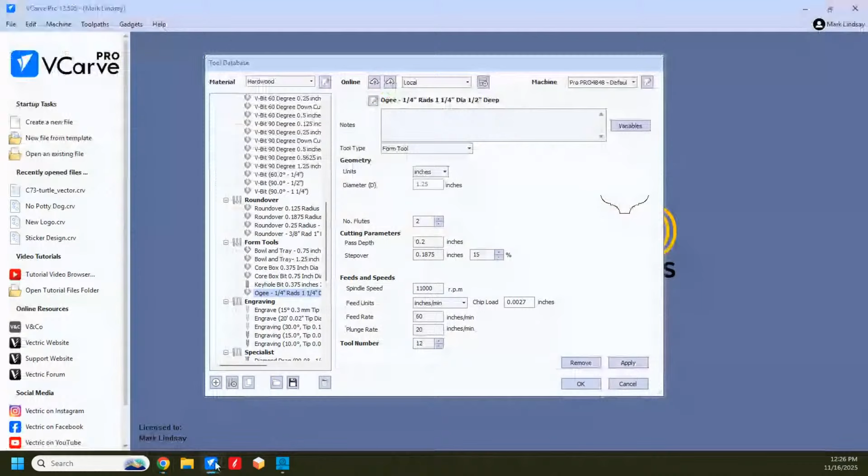I'm going to go over here and download it. Now that brings up another question - where am I going to download this to? I'm going to download it to the tool database folder that all of these tools are entered into.

But I'm going to cheat, and I'll show you that cheat. Click Cancel to get out of my tool database. If I go up here - and again, I'm in Vectric 12.505 - if I go up here to File, then come down to Open Application Data folder, click on that, it's going to open up all the program data for this version of VCarve, the current version I'm using.

You can see through my address bar up here where this is located. It's on my C drive. The folder is Program Data. The next subfolder is Vectric. The next subfolder is VCarve Pro. Then the next subfolder is 12.5, that's the version I'm using. And if I look down here, there's a folder that says Tool Database. If I go into that folder, there are all of my tools.

This right here, this database, tools.vtdb.vectric, that is the default tool database that comes with your software. None of the tools you have added are in this database. If you absolutely, completely, and totally, entirely mess up your tool database, you can always go back to this one and it will give you a clean install of the database that you had when you first started.

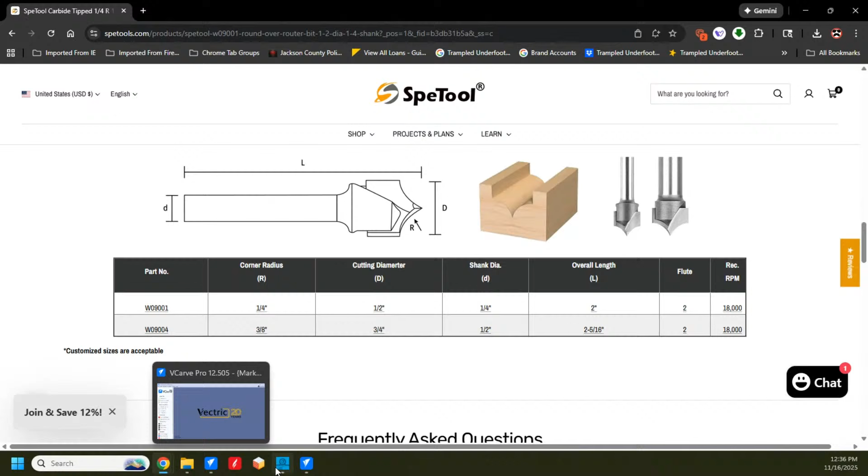So now let's go back over here. I'm going to look at my bit, and make sure this is the right part number - it's the W09001. Okay, not too bad. I'll come down here to VCarve 12.0. I'm going to go into the SpeTool database. There's roundover bits right there - point roundover bits right there. And here is the 1/4 inch shank category. And there is that tool - W09001. There is everything I need.

But it's in version 12.0. So what I want to do is export this tool only - this is the only tool I own, so I want to export it so I can import it into version 12.5. With that bit selected, I can come right here, export the selected tool or group. So I'll click export. Now where do I want to export it to?

I want to export it to the version 12.5 database. So I'll go into 12.5, tool database, and I'm going to call it - let me do a cheat here, I can come back and change this - SpeTool. There, I'll just copy that: SpeTool, carbide tipped roundover 1/4 inch radius. Right click, copy. Go back - oops, yes, go back into 12.0. I'm going to paste it right there. I can change this name later, but this identifies which tool I'm putting in the database. And I'll click save.

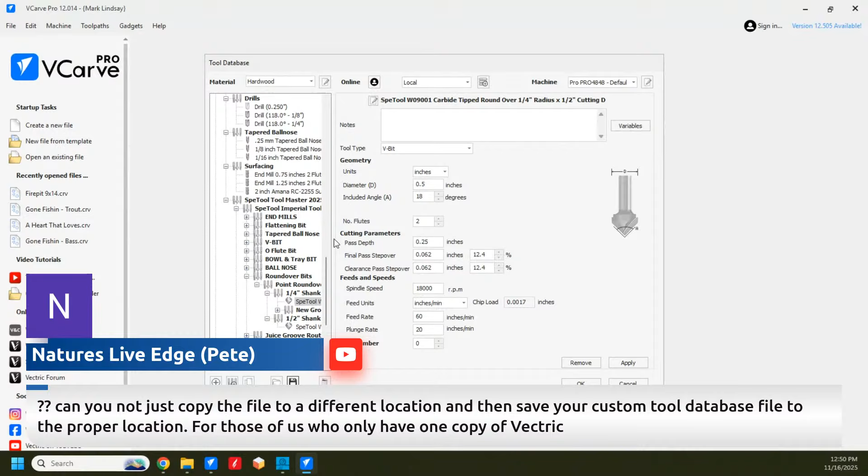So basically what I've done is I've taken that one SpeTool roundover bit, added it to my current version of VCarve Pro that I use, and I didn't download this entire catalog and clog up my tool database with a bunch of tools that I don't own. Now, this may not seem like much, but when you add this database to the IDC database, to the Amana tool database, to the Whiteside tool database, you see where I'm going with this. It can get pretty intense.

You just saved me from downloading way more than necessary. I will have to watch and pause again later. That's why I'm going slow, is to give people a chance to pause and come back.

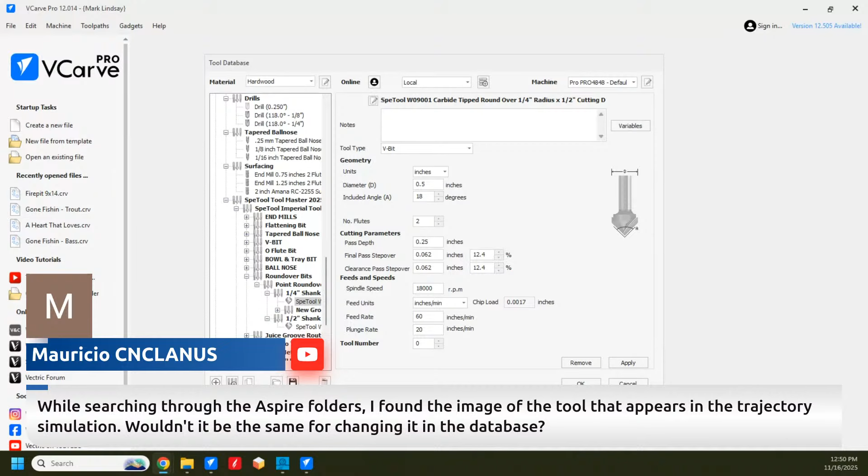Mauricio says, while searching through the Aspire folders, I found the image of the tool that appears in the trajectory simulation. Wouldn't it be the same for changing it in the database? It might, you can give it a try, Mauricio, because you're way, way outside of the scope of what I'm teaching and way more advanced. All I can say is try it, but be careful. And don't delete anything, because you may have to go back.

Okay, so it looks like YouTube was buffering here. You know what? That's nice to see that it's not just me. Earlier I was having problems while watching another video.

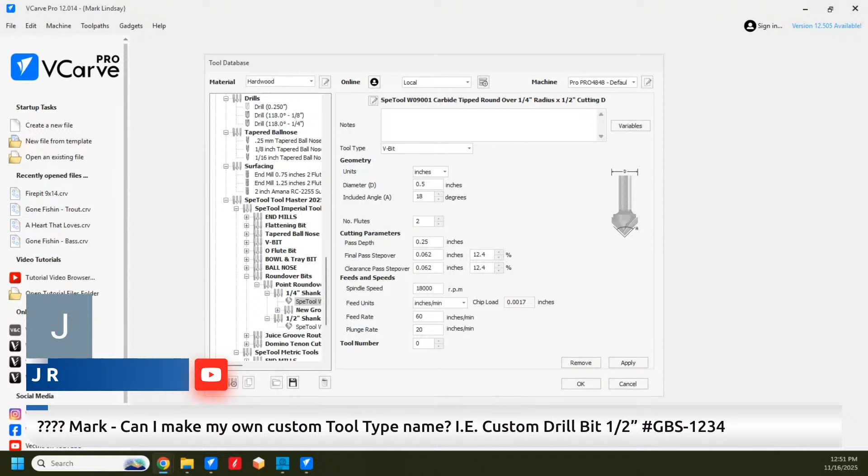JR is wondering, can I make my own custom tool type name, i.e. custom drill bit, 1/2 inch number, GBS 1234? You certainly can. You can name it anything you want to. You can name one of them Grace and the other one Arnold if you want. You can name it anything you want to. It's 100% different.

Can I use a file colon slash slash URL to treat a local file as online? Yes, you can. Again, that's getting a little bit outside the scope of this discussion, but yes, you certainly can. And that's where this trail comes in, because basically what that URL would be in this case, it would be C:/program data/Vectric/VCarve Pro/version 12.0/tool database, and then the file/that file. But again, that's way outside the scope of this. I didn't want to confuse everybody, but you are 100% right. And that would be your custom tool database. So you could have this entire tool database there.

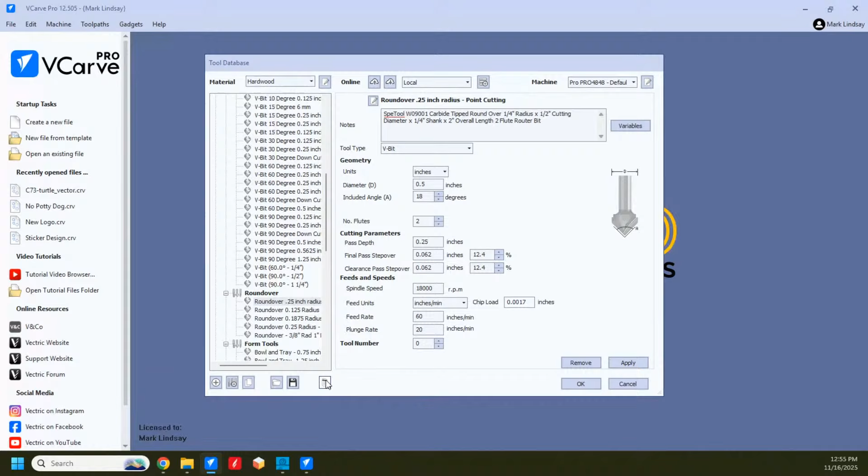Remove the selected tool or group. I'm going to click on that. Removing one tool will remove all the cutting data defined for it. Are you sure you wish to delete it? Yes. Boom, it's gone. I come back into Roundover and it's no longer there.

So for instance, if this keyhole bit right here, if I buy a different keyhole bit and the settings are different, maybe a different diameter or a different brand, and I no longer own this bit, I can just select it, click on that garbage can, and it goes away. Same thing with all these V-bits. Sad part is, I do own all these V-bits. It's easy to go crazy.

So that was a long trail, and a long way to go to get some basic things figured out. Now, what if you get a tool and they don't have the tool database file for you?

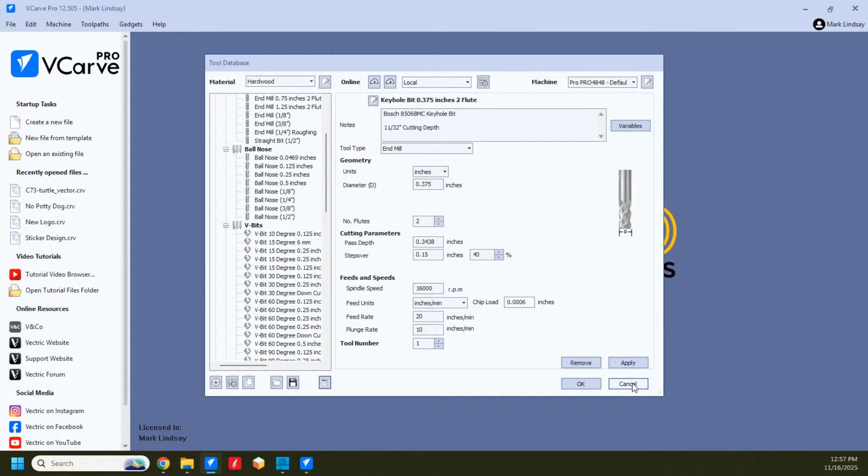You've got to draw it in yourself. Let's look at my core box bit as an example. So what I'm going to do right now is cancel and get out of my tool database. For this I do need my project out here, because I have to draw the geometry of that tool in here.

So for a core box bit it's really easy. I'm just going to accept whatever it is here. Now, looking at that diagram I showed you on the back of the label of my Freud round nose bit, that core box bit, it's a 3/4 inch diameter. So first thing I'm going to do is come up here, and at X0, Y0, I want a circle with the 3/4 inch diameter, 0.75. Whoops, back up, didn't hit the 7 hard enough. 0.75 diameter, created. Okay, so there's my circle. All right, close.

Now, when you're entering a form tool, you have to take into account that it needs an open vector that represents the right side of that tool's shape. So I've got the vector selected. I'm going to tap the letter N on my keyboard and go into node editing. So for this tool, I need this right here, the right side of the tool's shape.

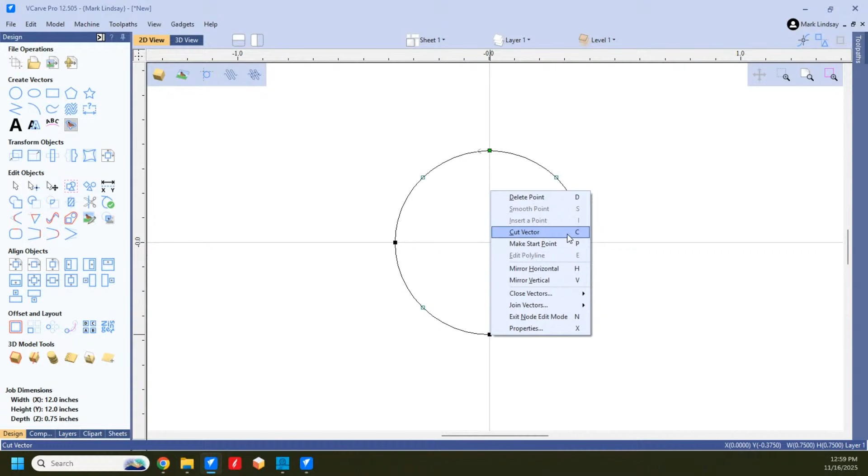So I'm going to put my cursor right here, right click, cut vector, and I see the keyboard shortcut is C. I want to cut the vector right there. I'm going to come over here and use that keyboard shortcut. Put my cursor right over that point, tap the letter C. Okay, now I can right-click twice to get out of node editing. Select this, and delete it. That's all I need.

Now I can add this tool to my tool database. So we'll come up here to Tool Paths, Tool Database, and I want to add a new tool. I need to come down here - let me see, I've already got it in core box bit. It's right here, that's the bit I'm entering. So I'm going to put it under ball nose bits, and I'll delete it again later on. But it needs to be a form tool, so I have to put it in here. I'll just call it something else. So under form tools, I'm going to say add a tool under that selected group. It is a form tool.

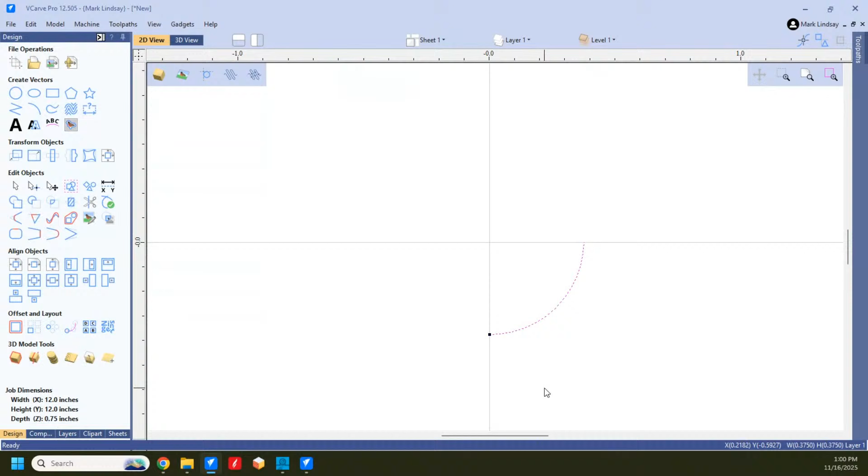Now you notice what it did. I'm going to cancel real quick. Here is that vector, select it. Go to Tool Paths, Tool Database, go down to Form Tools - and this is the only group where the software will do this. Add a tool under that selected group, tell it it's a form tool, and it took that selected vector and created both sides of that tool's profile.

Okay? Now, it already knows the diameter is 0.75 inches. Now I just need to enter the number of flutes. Well, this has 2 cutting flutes, so 2 flutes. And now, because there are no settings to copy, I'm going to create those settings. Okay, 2 flutes. Got a pass depth - I'm going to try that, that's, what is that, 3/16? I'm going to try that and see how that works. And a step over of 20%, I'm going to try that and see how it works.

However, I do know that the spindle speed - for this I'm going to put it at 16,000. And my feed units are right here. For the feed rate, I'm going to go with 100 inches per minute, and I'm going to do a plunge rate of half of that. And I'm going to give it a tool number. I'm trying to remember my naming convention - I don't remember what, because I put every bit in a different category and I'm using different digits. For instance, all of my end mills are single digits starting with 1. All of my V-bits are 2 digits starting with 30.

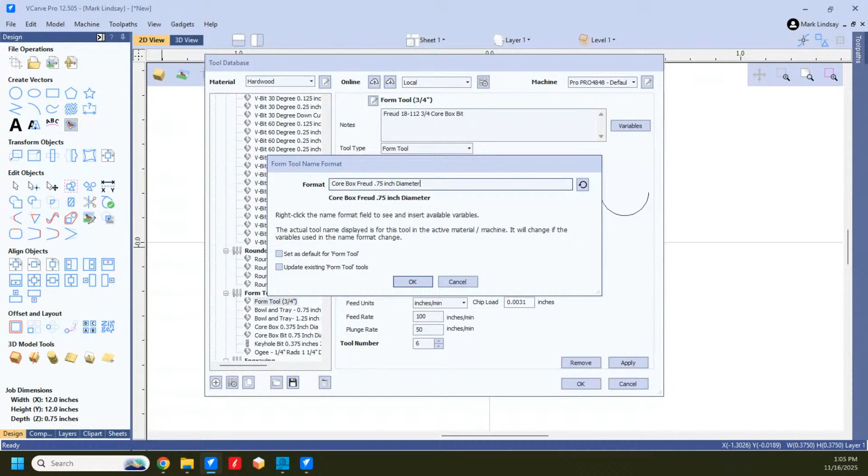Freud, 0.75 inch diameter. Looks good to me. Click OK, and now there it is right there. Apply, and everything is set. Click OK, and it was all based on that.

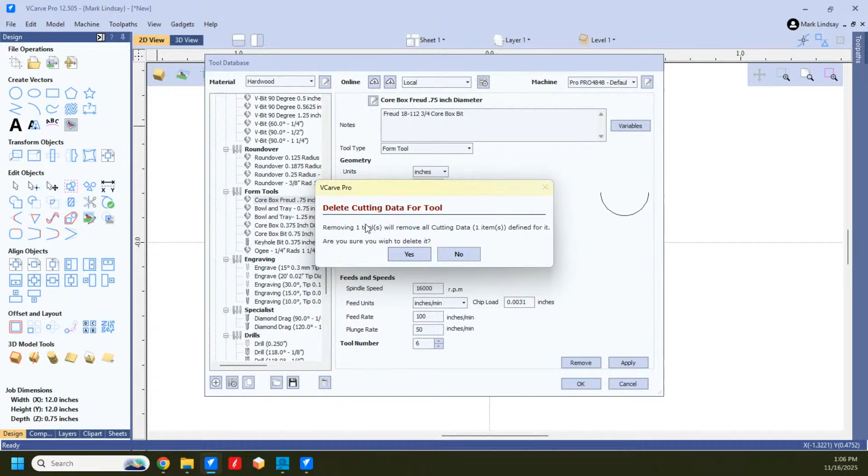Back up here to Toolpaths, Tool Database. Because I already have this tool entered in my tool database, it's this one right here. I don't need this one I just created, so again, I can just get rid of it. Delete the cutting data for that tool. Yes, now it's gone. Again, I already have it right here.

So, let's see here, if I've got anything here. Where am I backing it up to? Here and there. I will add tools tomorrow, I don't want to cry today.

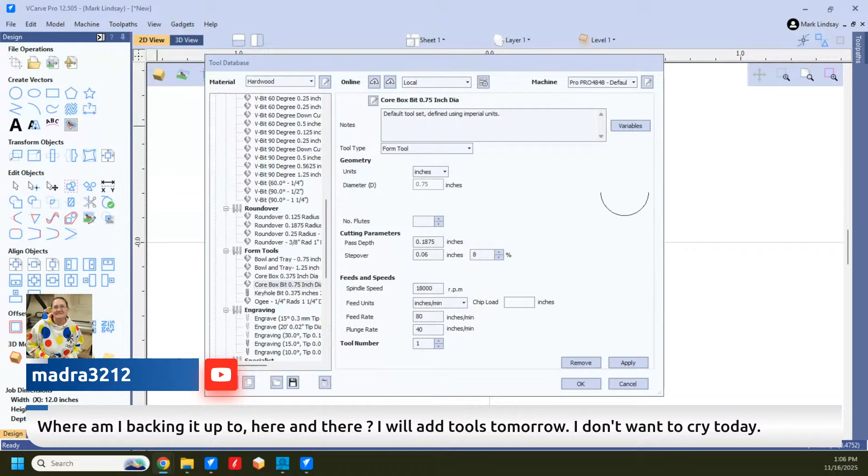Again, Ellen. Okay, wait a minute here. I am not techie, I don't know what I'm doing. Thank you, Mark, I will watch, pause, and pray.

No prayers needed, Ellen, just watch, pause, and again, do all of this in a previous version of the software. That way you're not messing up the tool database that you're actually using, okay? Practice, practice, practice, and remember, if you screw it up entirely, you can select it, delete it, and start over. Just drive on.

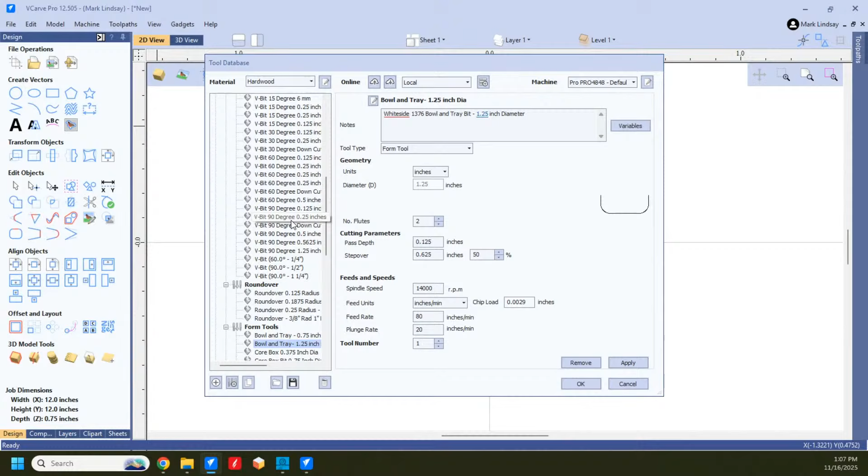The tool database has a lot of things to it. It has, for instance, VBits. You get into VBits, it knows what a VBit is. It knows the units, it knows the shape.

What you have to tell it is the angle, and that's the complete angle. You have to tell it what that angle is. In my case, it's 60 degrees for this bit. In this other bit's case, it's 3/8 of an inch and 90 degree VBit. So it knows what a VBit is, it just needs to know the angle, then it can calculate everything else.

Probably the easiest one is the end mill. But let's say, for instance, I've got a 16th inch end mill, I've got an 1/8 inch end mill, I don't have a 3/16 inch end mill. Let's just say, for the sake of argument, I just bought one. How do I enter a 3/16 inch end mill?

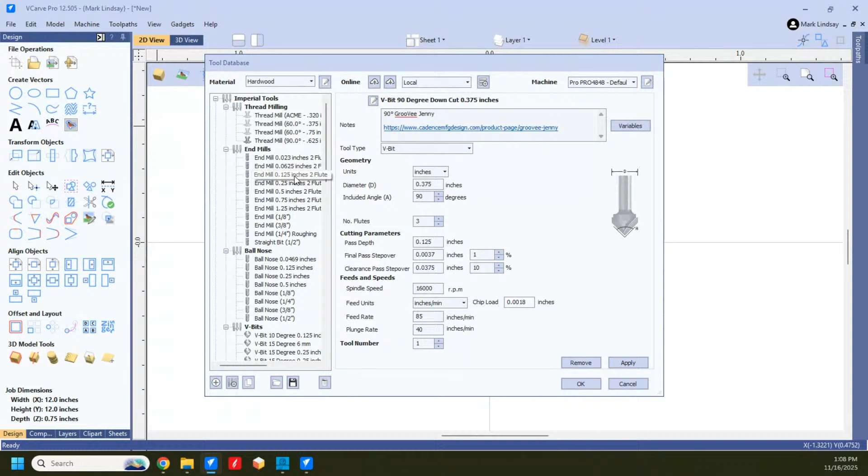Well, the easiest way to do that is to select a bit that you do have. In this case, 1/8 of an inch, I have an 1/8 inch end mill. Then come right down here and, where is it, copy the selected tool. Select the tool and copy that tool. Boom. Now I have two 1/8 inch end mills listed here.

I'm going to copy the settings from this same tool, the same machine, and the same material. I'm going to copy that. Now I'm going to make the changes. First things first, the diameter is 3/16, it's not 1/8 of an inch. Now, I don't remember the decimal equivalent of 3/16 of an inch, so I go...

3/16 equals, and it enters that for me. I don't have to know it, I use the built-in calculator. Again, I enter the fraction, then I hit equals, and it does the math. It changes the name, I just have to make sure all these settings down here are correct.

I can go through now, and is it a 2 flute? If it is, leave it alone. If it's not, I can change the number of flutes. I can change my pass depth if I need to, I can change the step over if I need to, spindle speed, feed rate, plunge rate, all of that. I can go through and change all that.

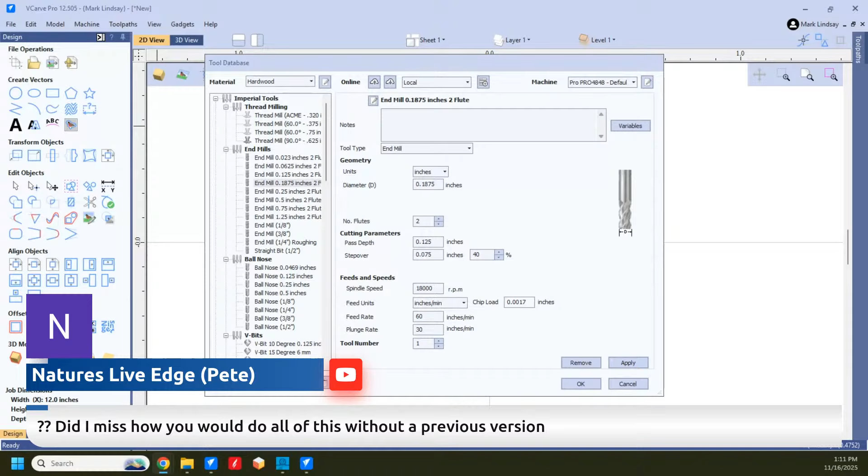Okay, now Pete says, did I miss how you would do all of this without a previous version? No, you didn't miss it because I didn't talk about it. The way you would do all of this without a previous version, sorry to say, kind of dovetails in with another question we had up here. Robert Terry asks, can't you download the database to 12.5, copy the tool you want, then delete that downloaded database?

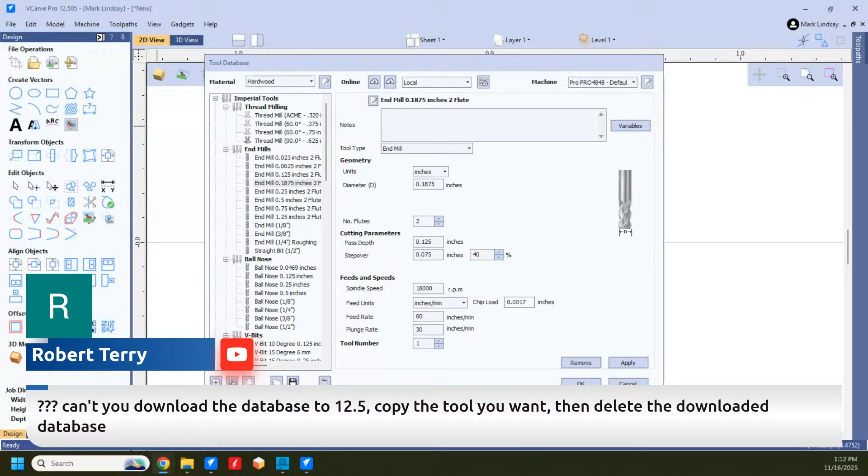You certainly can, and Pete, that's the way I would do it. You could download that database to version 12.5 and install it. Then you don't even have to copy the tool. Let me show you, Robert. Let me go back over here to 12.0 because that's where I downloaded this. We're looking at this tool, the SpeTool 1/4 inch roundover.

I can download this to my tool database, the entire SpeTool catalog. Then I can click and drag, and just keep dragging till I get up here to my roundover bits, which I don't have in this tool database. I have my roundover bits here in the form tools, and just drop it. So now I've dragged and dropped that tool, because that's the only one, supposedly, that I bought from SpeTool. Now I can select that master database and I can delete it.

489 tools, okay? Yes, delete it. Now that SpeTool database is gone, but I come up here, I still have that roundover bit. So that's how I would go about that, Pete, if I didn't have another version.

My reason for keeping the whole database in a previous version of the software is just for my convenience, because right now this is the only SpeTool, but I might buy something else. And then I can just go back to that database in the previous version, export the tool file, then import it into the current version. And both of them have pros and cons.

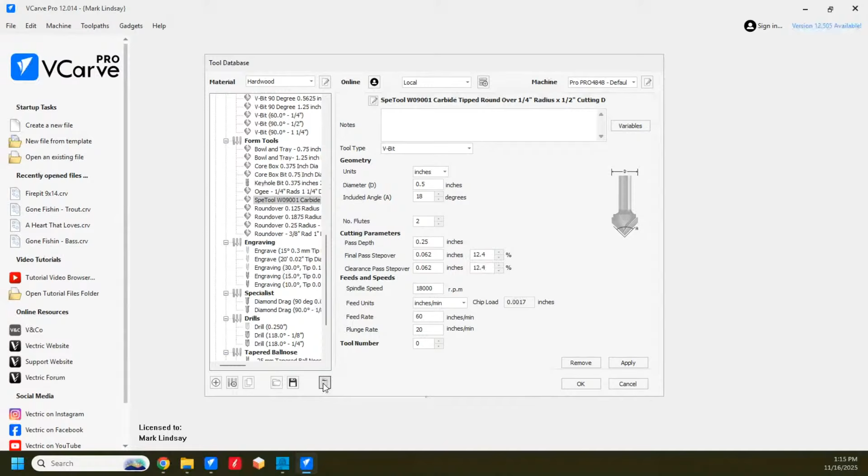Now, again, even here in my old version, I have a tool that I know I don't actually own, so I'm going to get rid of it. Delete. Delete. And now I have made a ton of changes. Let me cancel this and get out of 12.0. I have made a ton of changes to this database. Now I have to ask myself, do I want to upload this to the cloud so I don't lose these changes?

To be honest, all I've done is added tools and deleted them. So the net was I haven't made any changes at all, except this right here. I don't actually own a 3/16 end mill, I was just showing how you would add one. So delete, delete. Now at the end of the day, this tool database is exactly the same as it was when I first started this adventure. I have not added a tool, I've not changed a tool. So my attitude is no, I don't want to upload this to the cloud because it hasn't changed.

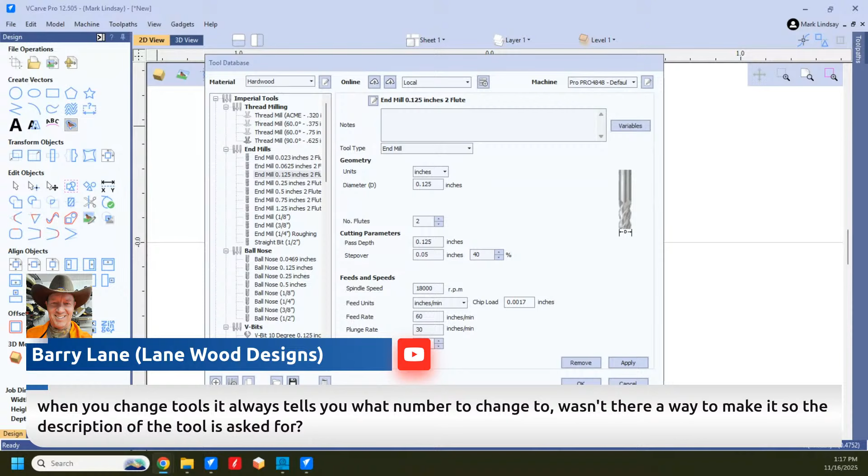I'm going to say that's probably within your post processor. I think that was within your post processor, but I would check. And another thing, make a copy of that post processor and play with the copy. Don't play with the original. Don't screw up your original. Make a copy. In fact, I think when you go to edit a post processor, it's going to force you to make a copy, but I could be wrong.

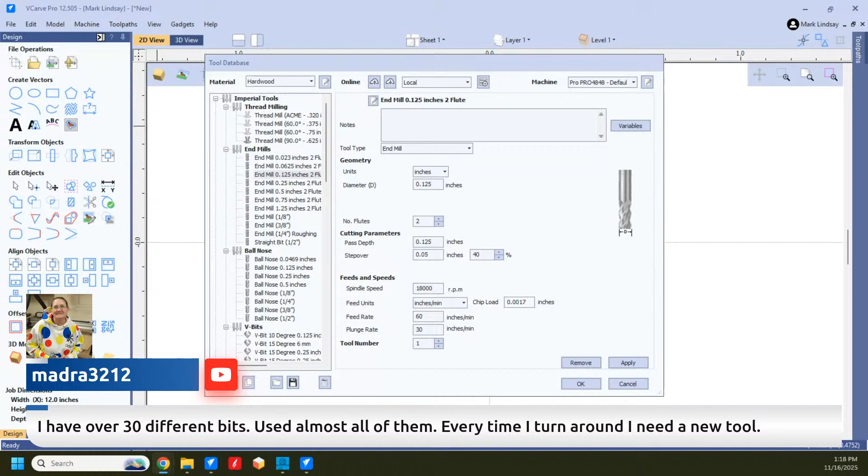All right, let's see here. Ellen says, I have over 30 different bits. I remember when I was new too—used almost all of them. Every time I turn around, I need a new tool. Welcome to CNC. Welcome to CNC.

The one thing that a lot of people don't know and don't realize is all of these bits, every single one of them—it doesn't matter if it's a $20 end mill, or that roundover bit we were looking at, a $21 roundover bit, or my surfacing bit, which was $160—all of these bits are consumable. They are going to get dull. They're going to get damaged. They're going to start making ratty cuts, and they're going to get thrown into a coffee can and forgotten.

Unless you're a guy like me that fills up that coffee can and takes it to a scrapyard and sells the carbide to the scrapyard. They're consumables. You are going to have to buy new end mills. You are going to have to buy new V-bits. You are going to have to buy new tapered ball nose bits. It's just a fact. It is just a fact.

Holy cow, how long does a $160 bit last? Well,

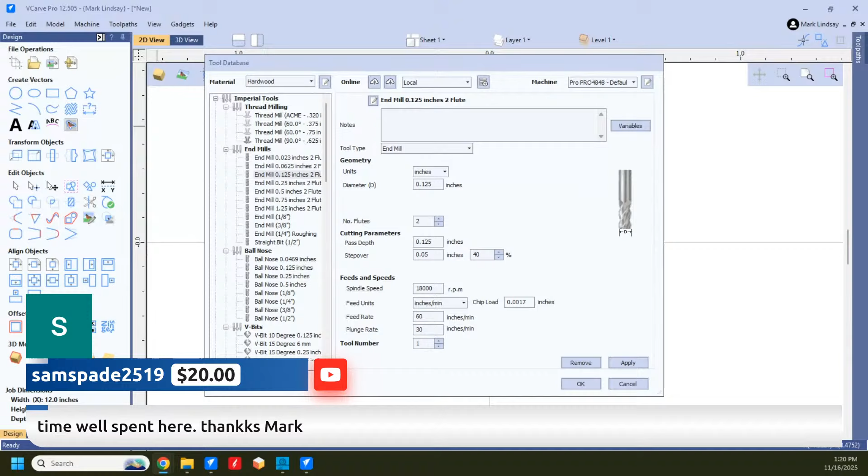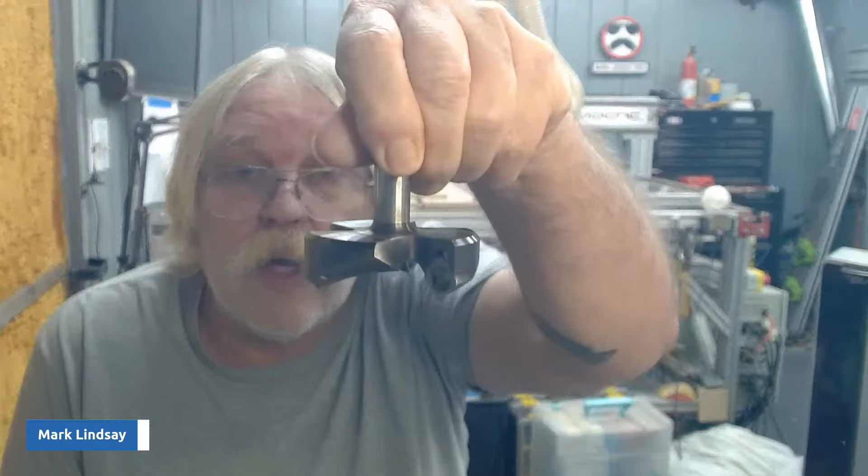Back to your point, Jack—how long does a $160 bit last? In the case of this surfacing bit, conceivably forever. Because I don't know why I'm still screen sharing, let me go back, make it all about me. Let me grab it. The cutters are carbide inserts, so conceivably I can replace these inserts as they get dull or damaged. I have rotated them one time, and with four cutting edges, conceivably it'll last forever, just however many times I need to add new carbide inserts.

But I'm here to tell you, this sucker is nice. Oh, it's nice. I think the price has gone up—I paid 160 for it, I think they're like 180 now. Holy, I don't know.

Ellen says, holy big bit. Well, it's 2-inch diameter, I've seen bigger ones. In fact, a couple of people here use 2.5-inch diameter surfacing bits. This one's only 2-inch. But I bought that bit on a recommendation from Shane Peters and Rob Sandstrom, who were using it at the time for surfacing epoxy inlays, and they both said that was the best bit they had ever used. So I bought one, and I'm impressed with it. I really am. I've not found a need to change to a different bit.

Rich Bratcher says, one steel screw will test that bit. Yep, that's why they have replaceable carbide cutters. So yep, but you're absolutely right. Here's Maurice says that's a great way to test your tram, and you are absolutely 100% correct. That will make you dial that tram in like you would not believe.

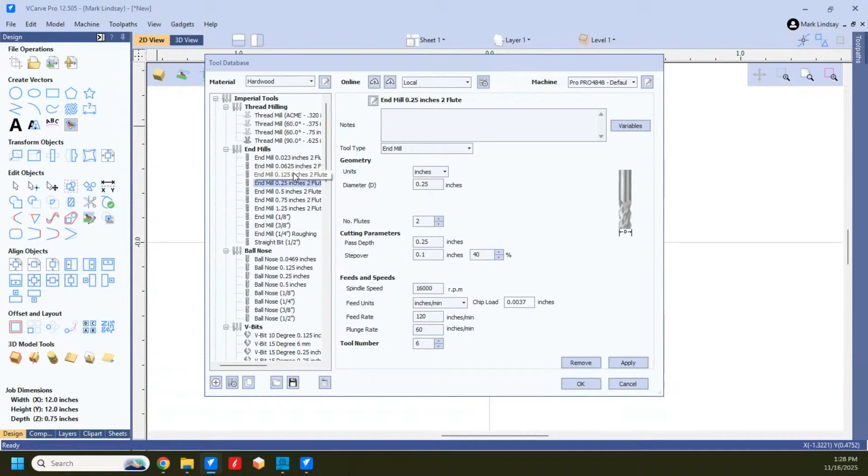Because now I can come here and it's telling me to insert tool number 5. Oh no, this is VCarve, that's why - I didn't do it in VCarve, no I don't want to save my changes. I did it in Aspire because that's what I use. Tool paths, tool database, end mill, half inch - that's tool number 5.

Now it's telling me to use tool number 4. Okay, VCarve, quarter inch end mill. That's tool number 4. No, I don't have a list printed up. No, I don't have this. I just basically keep the tool database open.

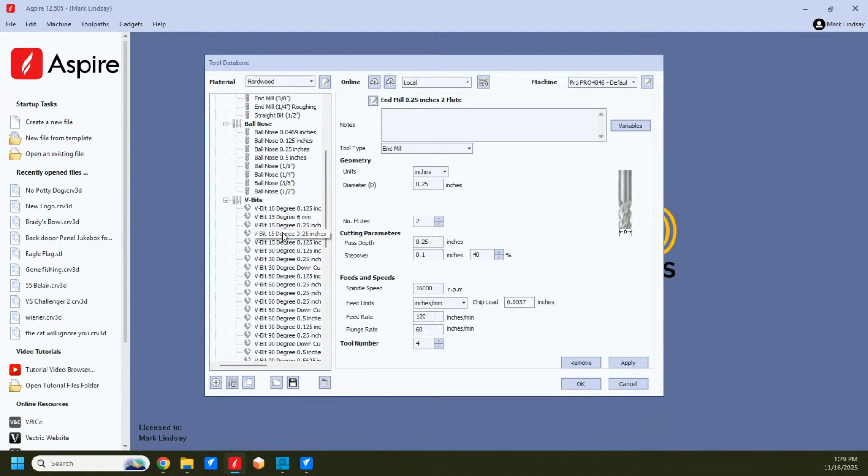I remember, okay, it's telling me to switch to tool number 6, and I know that's a V-bit. Which one? Or not tool number 6, it's telling me to change over to tool number 68. What is tool number 68? I can come over here and play around. Oh, there we go, it's a 90-degree V-bit. It's this particular Bosch 90-degree V-bit.

So it's a pain, but you get used to it. What I've got a label maker, and what I need to do, it's one of those cases of I need to do it, I just haven't done it. I need to get out here with my label maker and let it label all my tools with the tool number, so that when I pick up this particular 60-degree V-bit, I know which tool number this is, because I've got a label on it that tells me tool, whatever. I need to get out and do that. I just haven't done it yet.

So, Ellen, I don't know if I just confusicated you or if I answered your questions. I don't know if this was what you were asking about. If you need more, reach out to me and we can go through it.